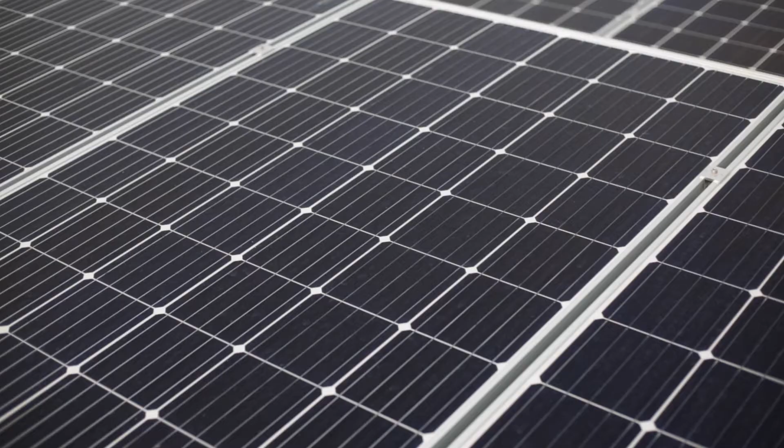This week we're looking at heat pumps. So after the presentation, you'll understand what a heat pump is, how it works, and how it compares to other methods of heating and cooling.

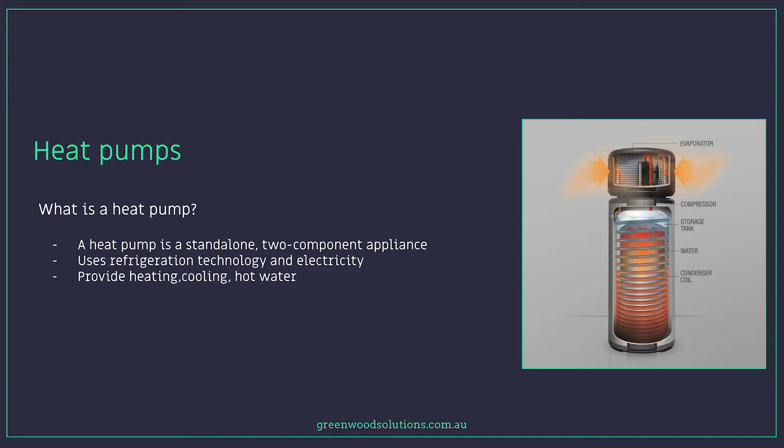A heat pump is a standalone two-component appliance which uses refrigeration technology and electricity to provide heating, cooling, and/or hot water. The main components effectively are broken down into two: a condenser unit that most often sits outside of a house that produces the heating or cooling, and an indoor unit that typically sits on a wall and passes hot or cool air into the home. Basically a reverse cycle air conditioner. Also, there are hot water heat pumps, which have a water storage component.

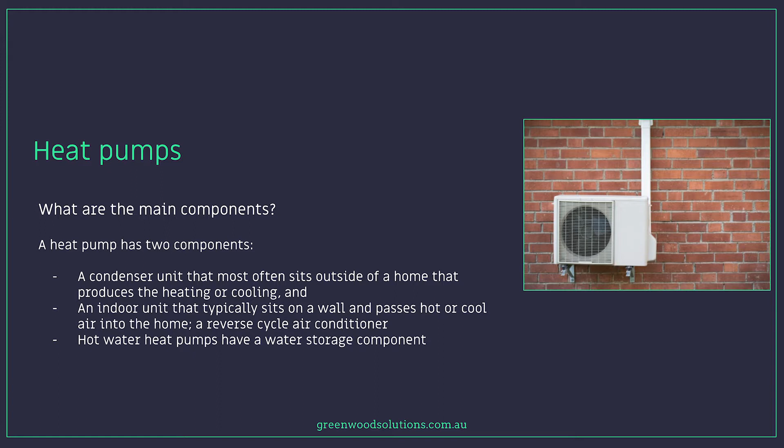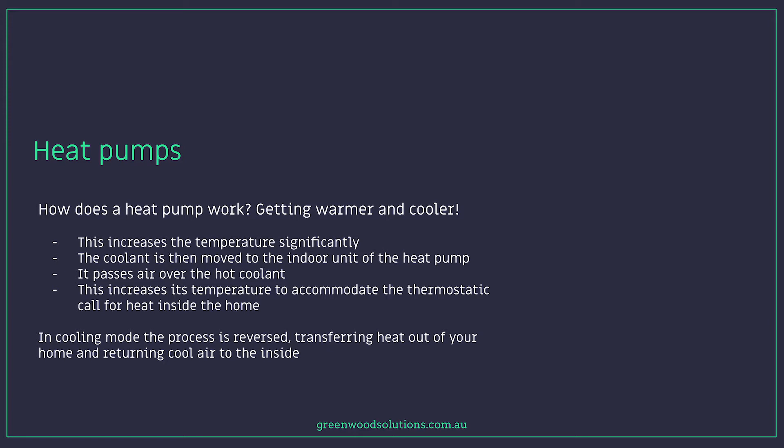Well, they extract heat from the air outside of your home, then transfer it to a refrigeration coolant, and the coolant is then compressed. This increases the temperature significantly. The coolant is then moved to the indoor unit of the heat pump, and it passes air over the hot coolant. This increases its temperature to accommodate the thermostatic call for heat inside the home. In cooling mode, the process is reversed, transferring heat out of your home and returning cool air to the inside.

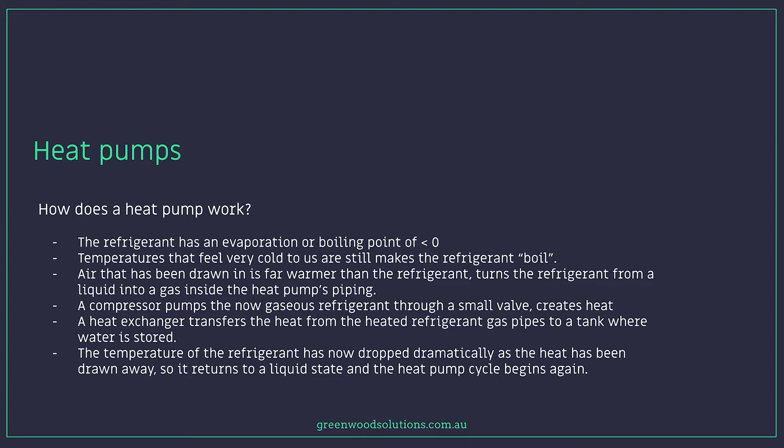The refrigerant has an evaporation or boiling point well below zero. Temperatures that feel very cold to us still make the refrigerant boil. Air that has been drawn in is far warmer than the refrigerant and turns the refrigerant from a liquid into a gas inside the heat pump's piping. A compressor pumps the now gaseous refrigerant through a small valve, creating heat.

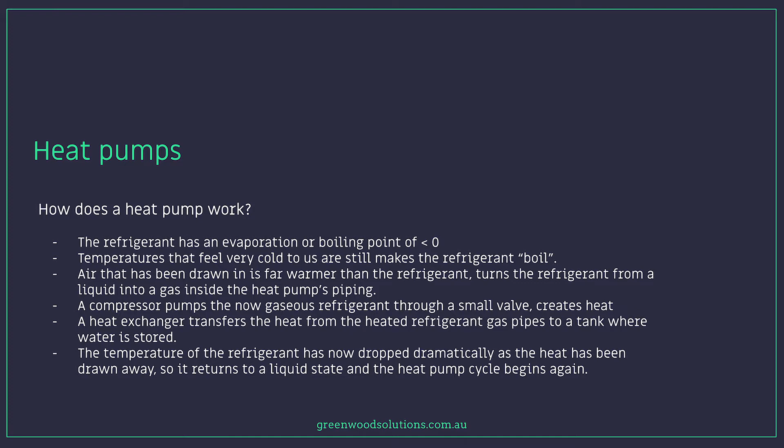A heat exchanger transfers the heat from the heated refrigerant gas pipes to a tank where water is stored. The temperature of the refrigerant has now dropped dramatically as the heat has been drawn away, so it returns to a liquid state and the heat pump cycle begins again. On and on it goes. So all three systems work exactly the same way.

With a hot water heat pump, it extracts heat from the ambient air and pumps it into the water. The water's in a storage tank. The storage tank has an insulative value, thereby maintaining that heat. Since this process merely concentrates existing heat instead of having to create more, heat pumps reduce annual hot water requirements by 50 to 80% compared to electric resistive home systems. Thus, they are considered renewable systems and are eligible for STC rebates in Australia.

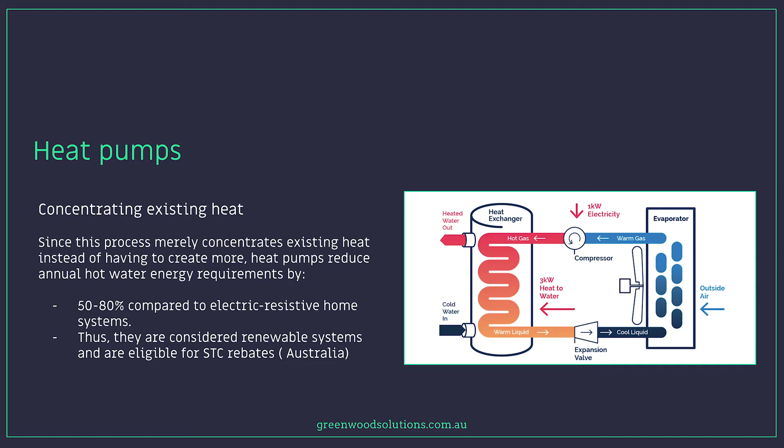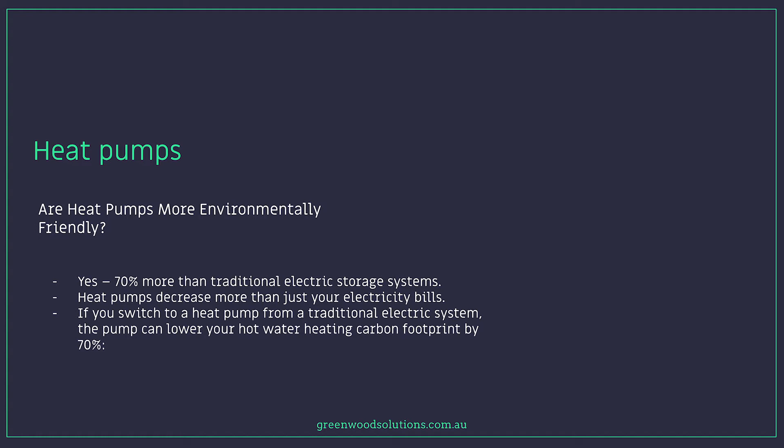So what's the ideal situation to contemplate a heat pump? Effectively, if you don't have roof area for solar panels and your loads are predominantly electrical, this is the ideal situation. Now, because a heat pump actually extracts ambient air and then compresses it, and in that process it releases energy, it does attract rebates and also other financial incentives to go down that track. Now, if you combine a heat pump with PV, you are actually heating your water at a considerably lower cost.

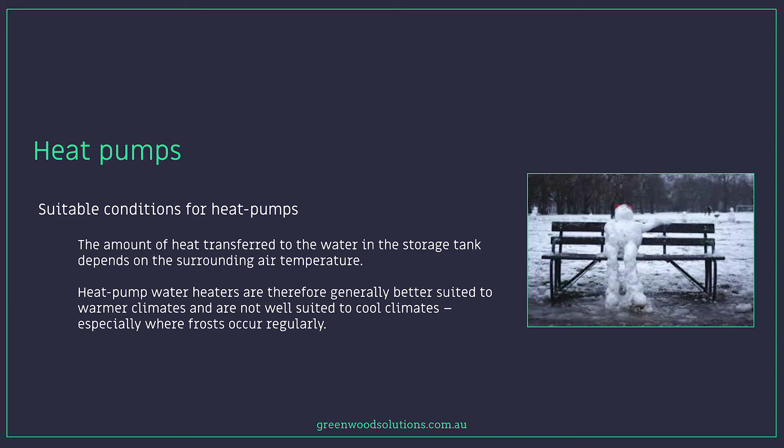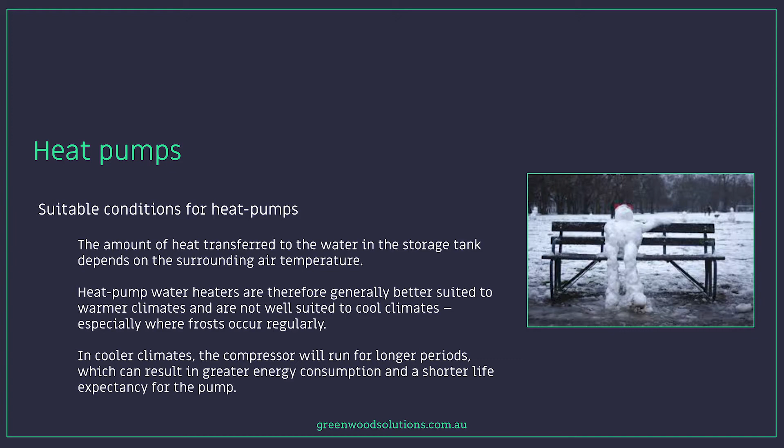The amount of heat transferred to the water in the storage tank depends on the surrounding air temperature. Heat pump water heaters are therefore generally better suited to warmer climates and are not well suited to cool climates, especially where frosts occur regularly. In cooler climates, the compressor will run for longer periods, which can result in greater energy consumption and a shorter life expectancy for the pump.

So there are some advances in this area where the heat pumps are getting more efficient at lower temperatures, but really at this point in time, from a cost-benefit analysis, if you are looking at a hot water heat pump, ideally you are in a temperate or warmer zone.

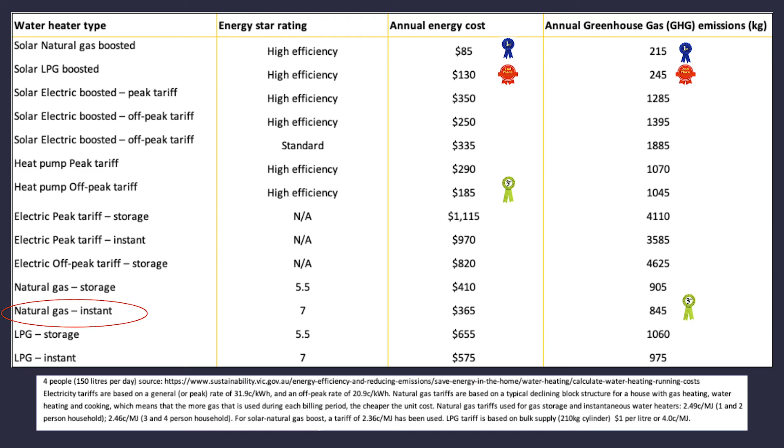So now we look at annual greenhouse gas emissions. The system that produces the least amount of emissions is solar natural gas boosted at 215 kilograms. Next on the list is solar LPG boosted at 245. And next on the list is natural gas instantaneous at 845 kilograms per year. So you can see from an emissions point of view that the heat pumps are not even in the top 3.

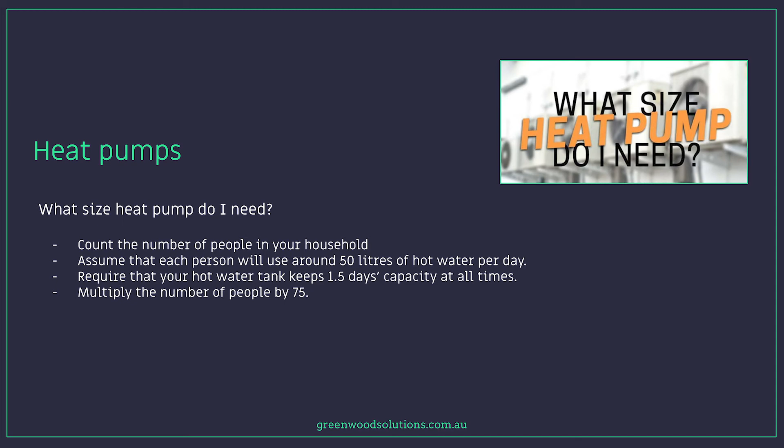So what size heat pump do I need? Well, effectively, the rule of thumb is count the number of people in your household, assume that each person will use around 50 litres of hot water per day, and this requires that your hot water tank keeps 1.5 days capacity at all times, so multiply the number of people by 75. So for example, a 300 litre storage tank will suit a family of, say, 4 people in most cases. Obviously that's dependent on how long people take showers and when they use the hot water. This all plays a role.

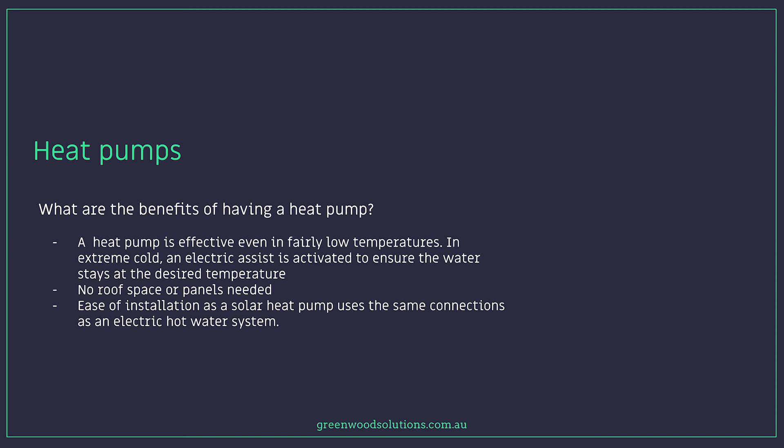There are government incentives involved with the purchase of a hot water heat pump. You're looking at the Solar Hot Water Rebate, you're looking at STCs, and you're looking also at VEECs. So there is financial inducement to go down this road.

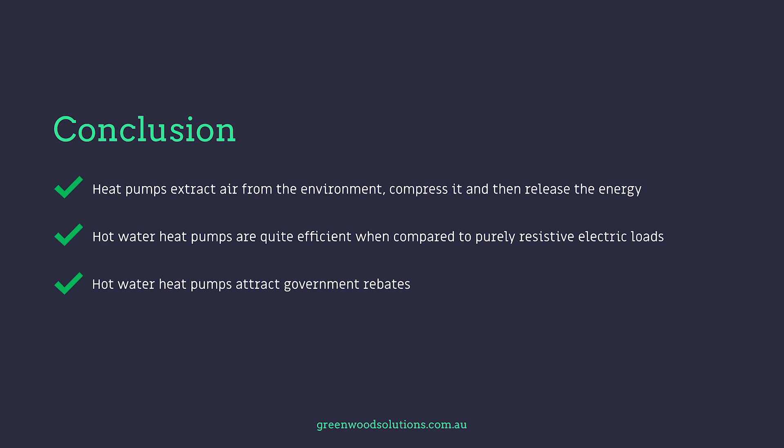Conclusion. Heat pumps extract air from the environment, compress it, and then release the energy. Hot water heat pumps are quite efficient when compared to purely resistive electrical loads. Hot water heat pumps attract government rebates.